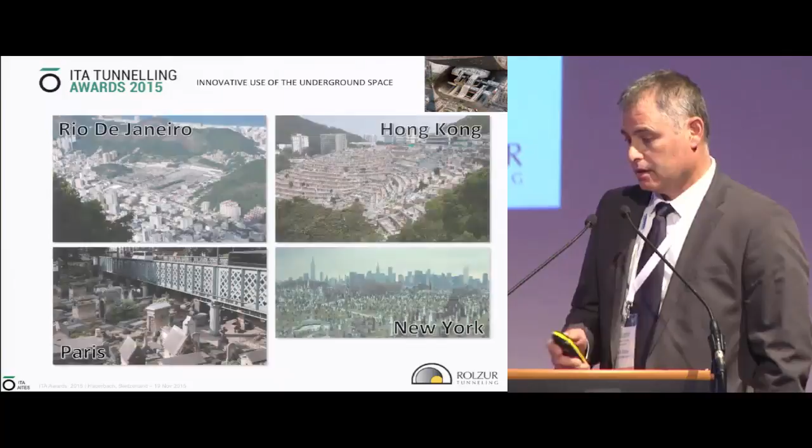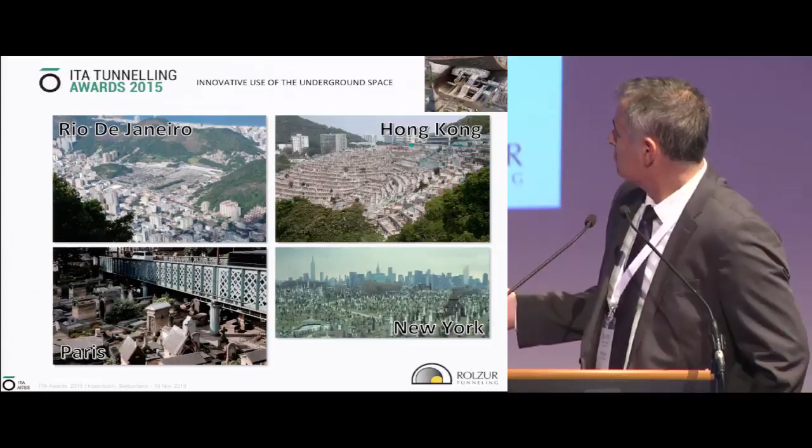Here you can see examples of graveyards from the world: Rio de Janeiro, in Botafogo, and in Paris, New York, Hong Kong. What we see, and I'm sure everyone saw it in his town or crossing through major cities, is crowdedness in cemeteries, narrow lanes, small paths, becoming smaller and smaller through the years. What used to be cemeteries used to be at the city outskirts, but cities grew and are growing all the time. As a result, the community and housing are suddenly going very next to the cemeteries.

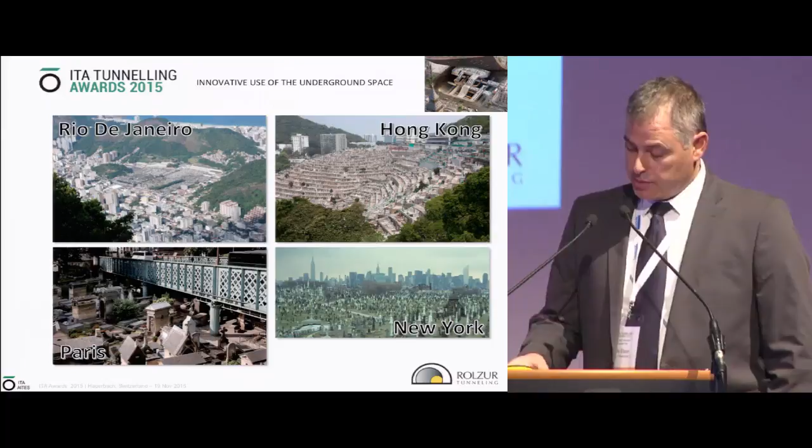Another problem is the decreasing number of visitors. Through the years, people less and less go to cemeteries to visit their deceased family members. And what happens is basically what I call lifeless islands inside cities. I'm sure everyone saw an example of that.

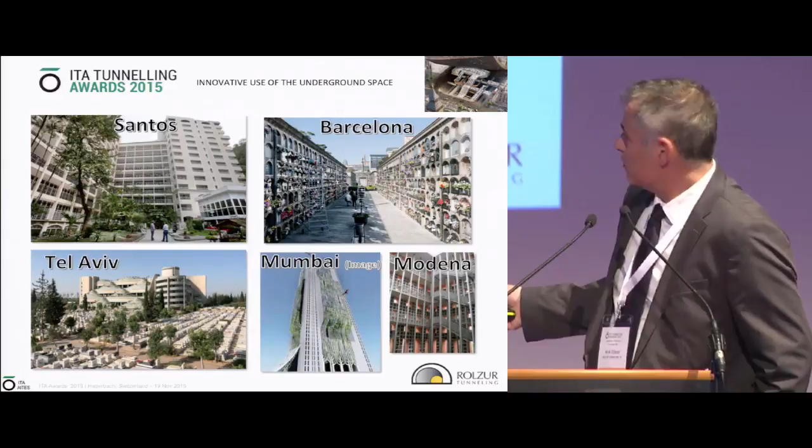Solutions worldwide, because of the cost of land and the will to save the environment and everything related to that, we see examples. For example, in Santos in Brazil, you see a huge building, like a skyscraper. Examples in Barcelona and Tel Aviv - this is recent, and we have similar things in Jerusalem, you'll see shortly. In Modena, Italy, a very nice building, but still a building where we are placing people.

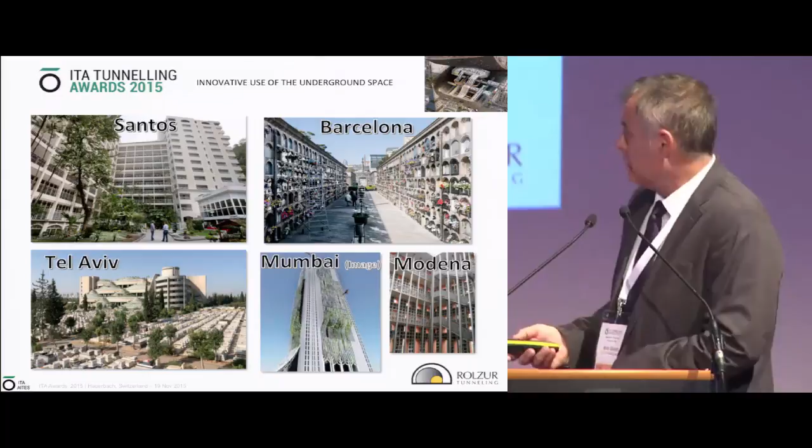And here is an image I saw that's planned to be done in Mumbai. Again, it sounds - you know, using today's world - I just don't like it, and I'm sure most of you don't like it either.

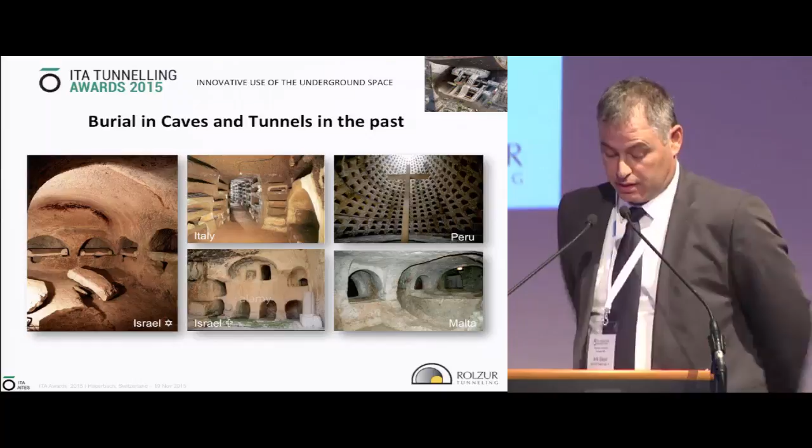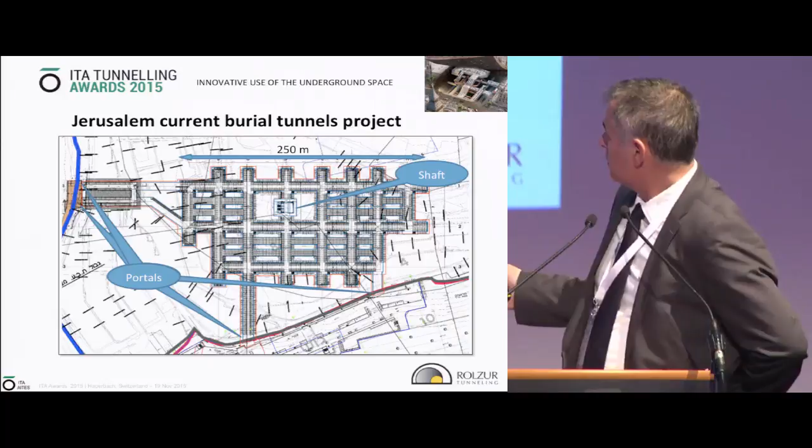This is the project we are doing now in Israel. We started a small pilot project here, a 250-meter tunnel, underneath an existing cemetery, and after we saw it makes sense, we are now building this big project. We have 4 portals, 1 main shaft with elevators, and this project is for 22,000 tombs that will be installed there through the years.

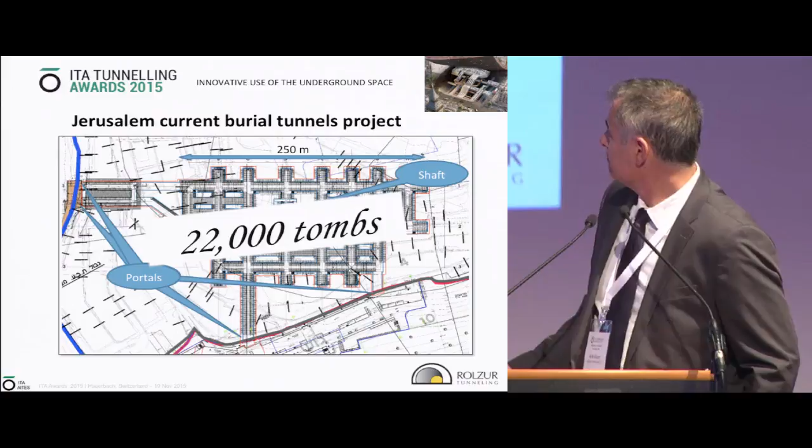Some points about design and construction aspects. Architecturally, it's very important to work with the client, and here again we are working with the client and his needs. We have to take care of lighting, acoustics, and the materials - everything is very important here.

Geology - as always in tunneling, we did some site investigation, and we are doing continuous ongoing monitoring. For tunneling, we are using the NATM system, so we have various methods for how to treat each type of rock, and we're using mainly roadheaders. We have to remember that we are working underneath an existing cemetery, so we don't want to use explosives too much in order to avoid interfering with the living people around. And of course, we have to take care of waterproofing.

Construction is very strange because cemeteries in many religions become sacred places. So actually you cannot come and wreck the building and start again after a few years, even though some countries do that. So we are building the concrete structures inside for an infinite life span. It's a bit different - each concrete element has to be thicker now, and everything is more of an investment.

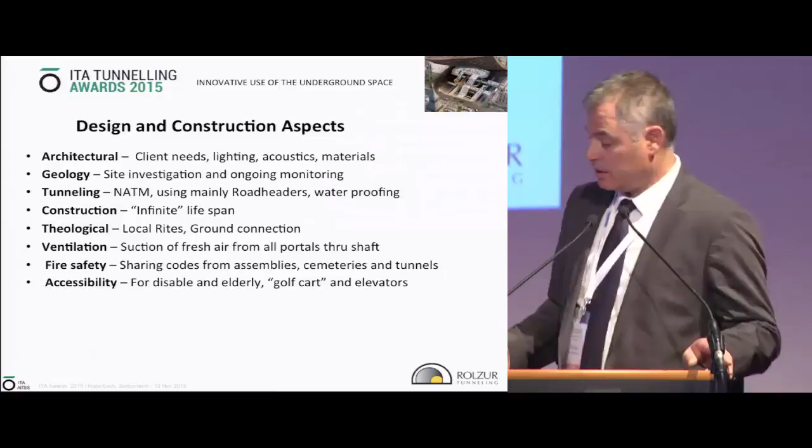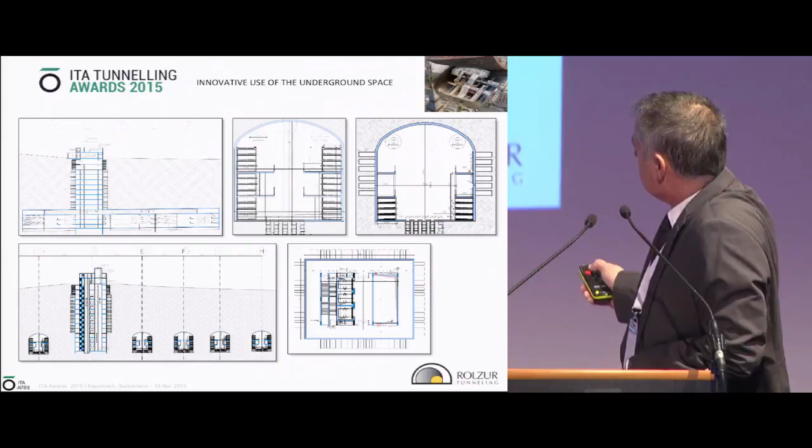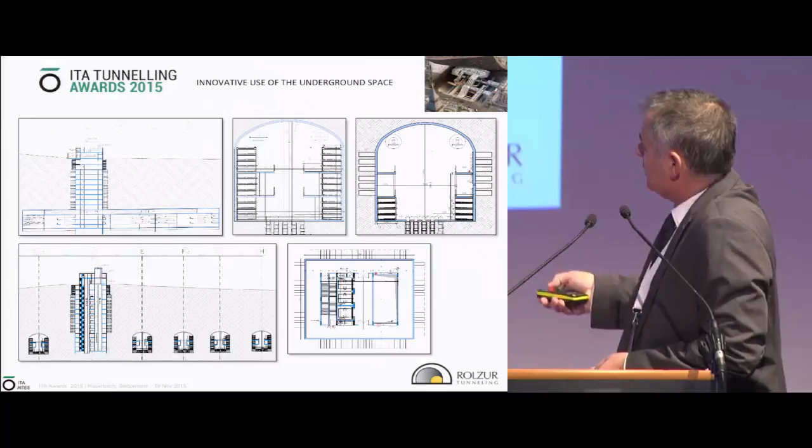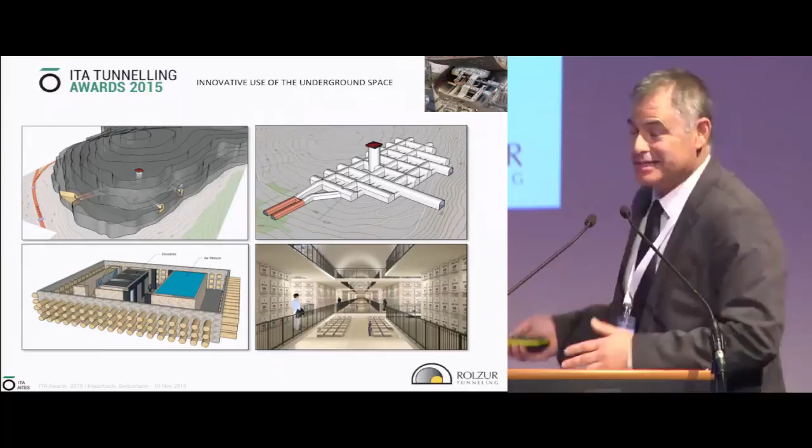This will hopefully show how it's going to look at the end. It's going to be very nice. Okay, I'm trying to speed up.

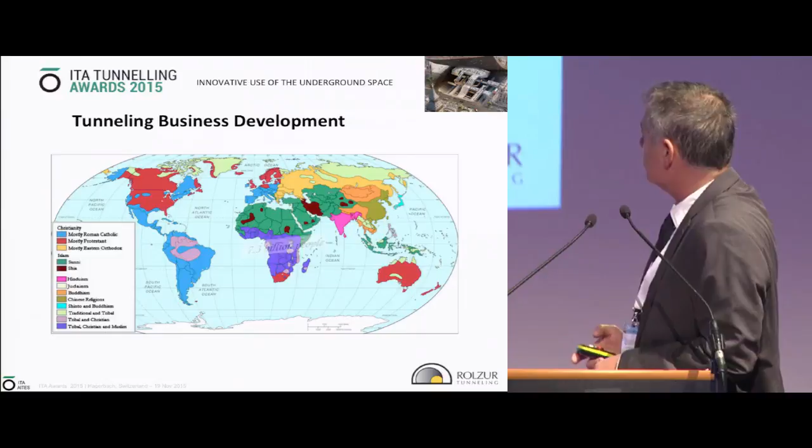Tunneling business development, actually the entire world. There are 7.3 billion people, lucky or not lucky, but whether we want it or not, in the next 80 years everyone has to be replaced.

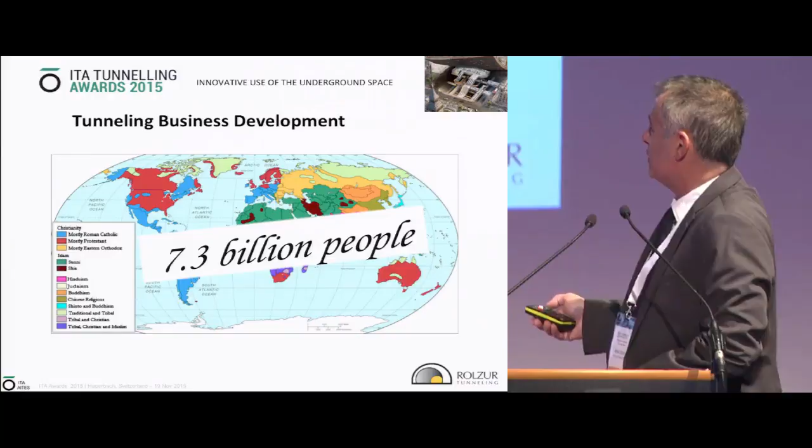It has to be developed in each place according to its rites and religion, and then it can be monitored and directed to the right solution. Some advantages, and I'll go very quickly: reviving ancient tradition is a kind of privilege, especially if you do it nicely and with new ideas.

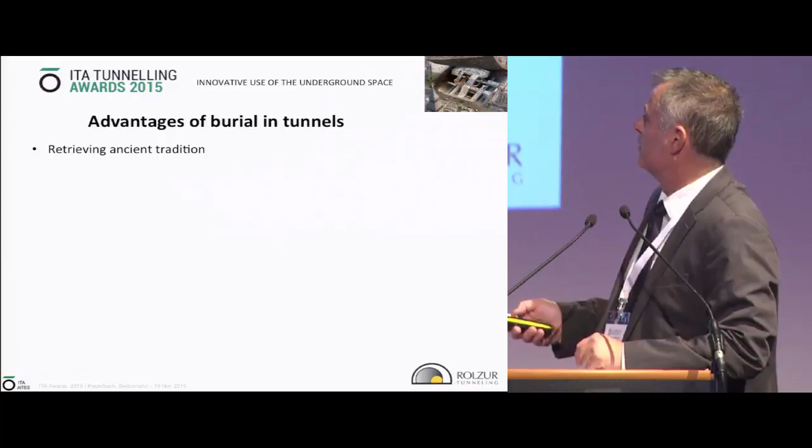Maintaining direct connection to the ground is very important that we keep it. Preserving the landscape, of course. Keeping the cemetery close to the community.

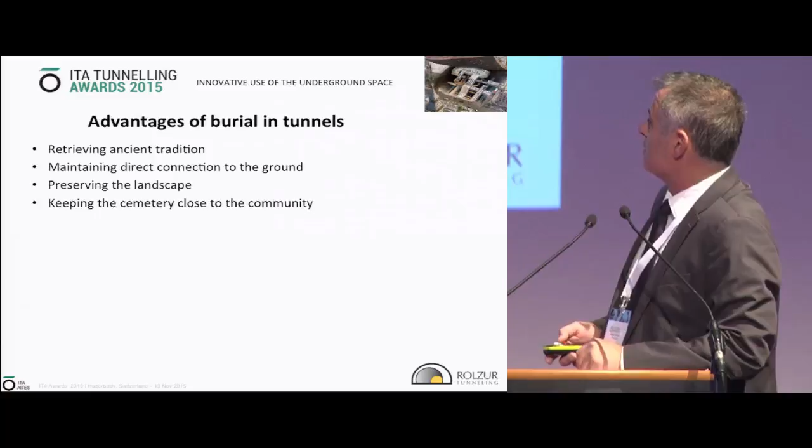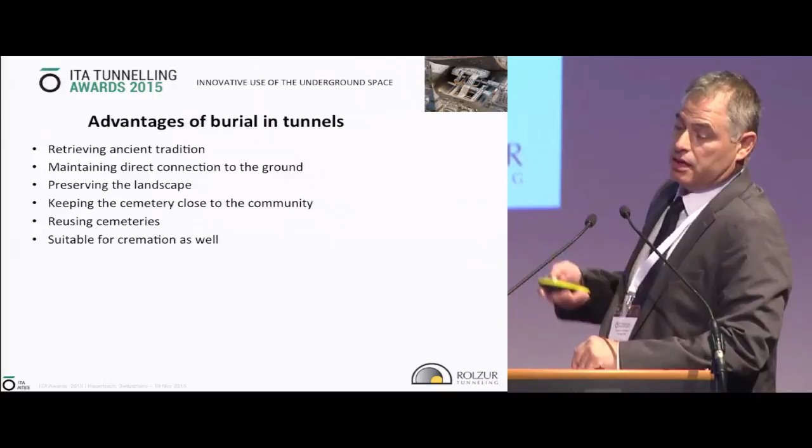Reusing cemeteries, because we recommend building it underneath an existing cemetery. It's also suitable for cremation, and this is a very big issue to talk about, but again, cremated people can also be placed there. It will always be a shelter from wind, sun, rain, and snow, so it will be okay to be there at any time.

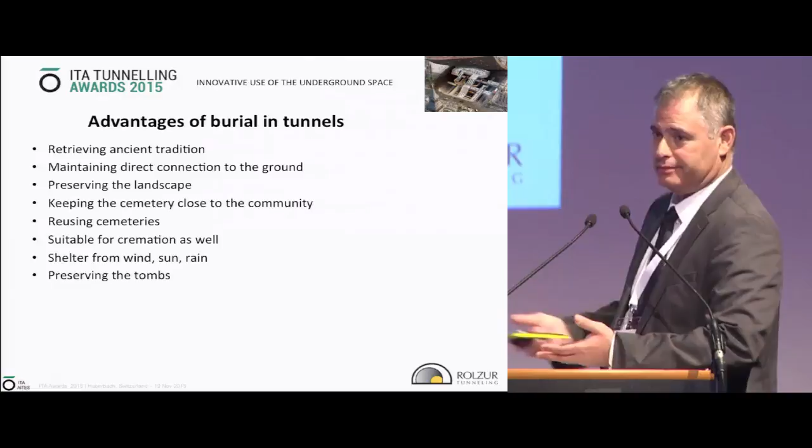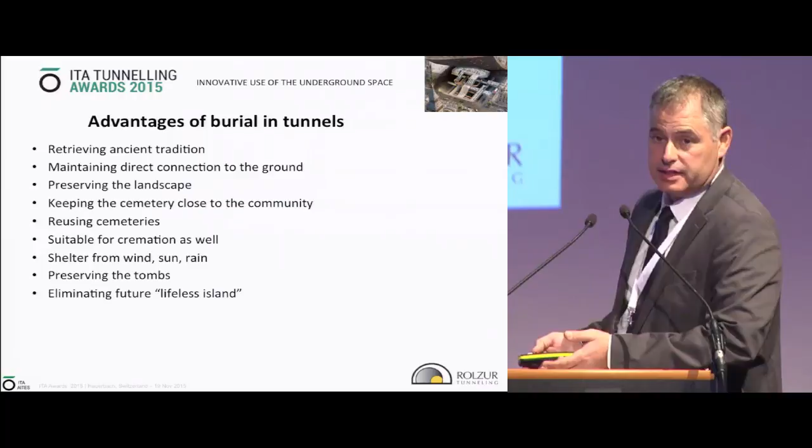Preserving the tombs - everyone has seen cemeteries where there are no more writings because rain and wind erased them. And of course, we are eliminating the future lifeless islands. So basically, reviving burial in tunnels - in the future we think it should be the future of cemeteries in cities around the world. Now I have a very short movie.

I don't know how it works.

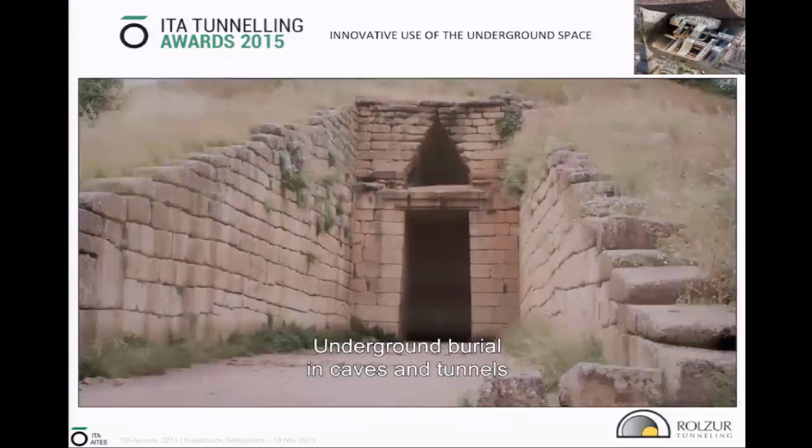Underground burial in caves and tunnels was common in biblical times and for thousands of years in the Holy Land as well as Europe. For dust you are, and to dust you shall return.

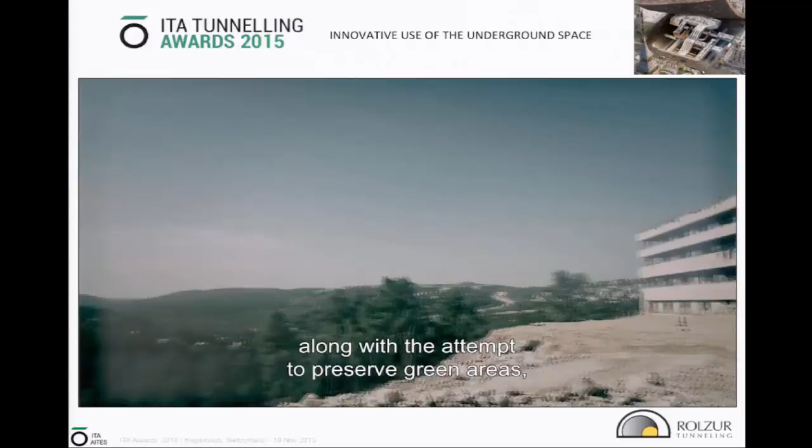In our day, due to population growth and land costs, along with the attempt to preserve green areas, cemeteries have become a nuisance, especially in cities and other large communities. They are lifeless islands in the midst of heavily populated areas. Cities worldwide are seeking to allocate less land to maintain current burial practices.

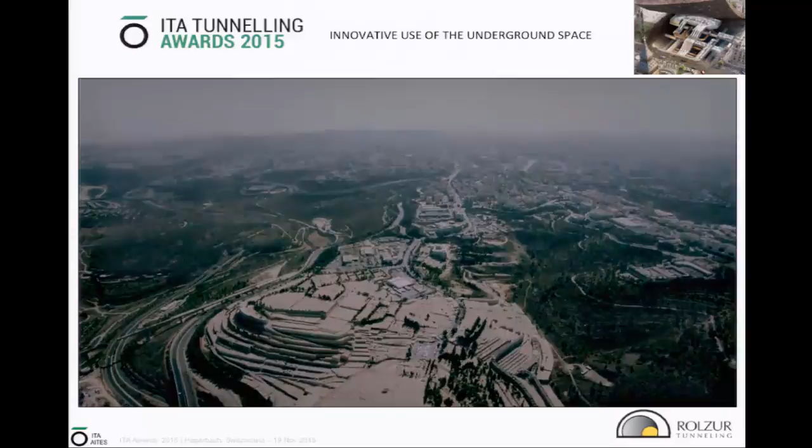Rolzur Tunneling, Israel's leading company in the construction of underground tunnels, caverns, and shafts, has come up with an innovative solution: reviving burial in tunnels.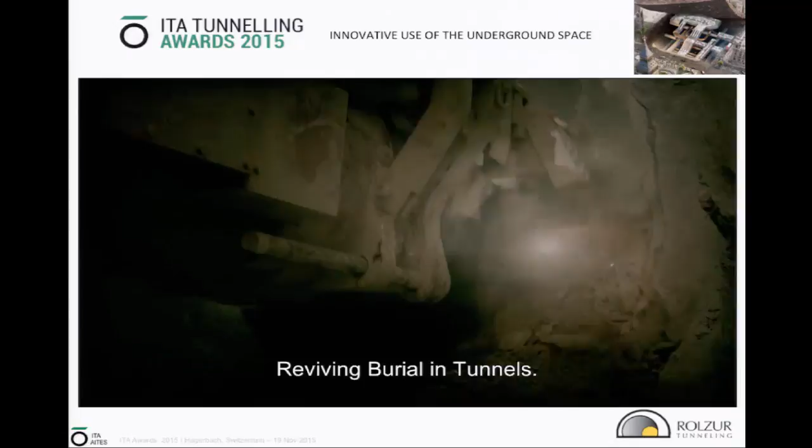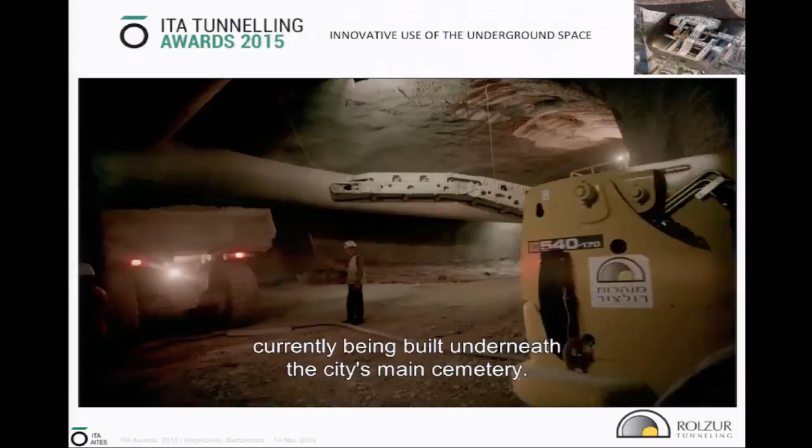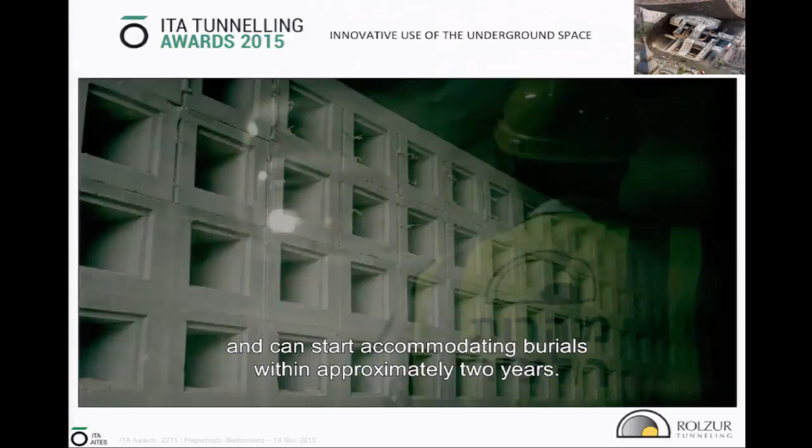A successful pilot experiment in Jerusalem led to a large-scale project currently being built underneath the city's main cemetery. The present project for the construction of 22,000 dignified, respectable plots will be implemented in stages and can start accommodating burials within approximately 2 years.

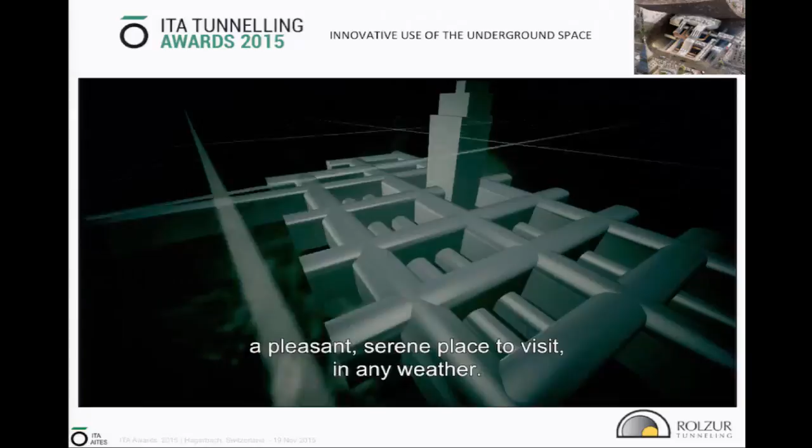One of our major goals is making the new underground cemetery a pleasant, serene place to visit in any weather. All religious guidelines and rites are being taken into consideration, alongside the required engineering aspects.

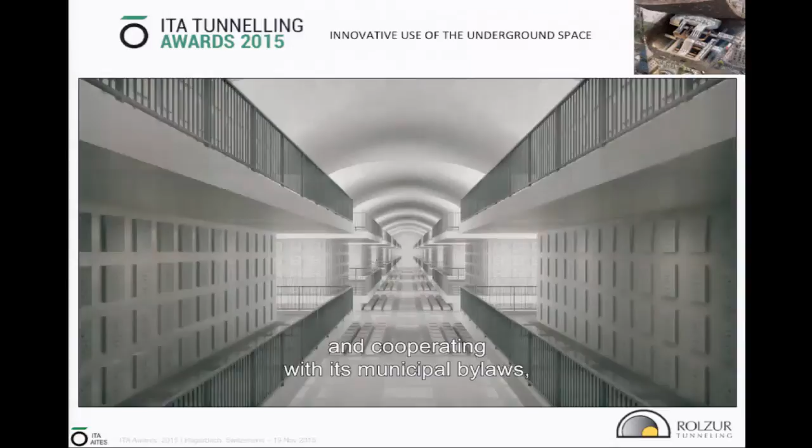We offer tailor-made solutions while working closely with each community, honoring its local customs and cooperating with its municipal bylaws to build the most suitable underground cemetery for that area. Environmental concerns are constantly borne in mind.

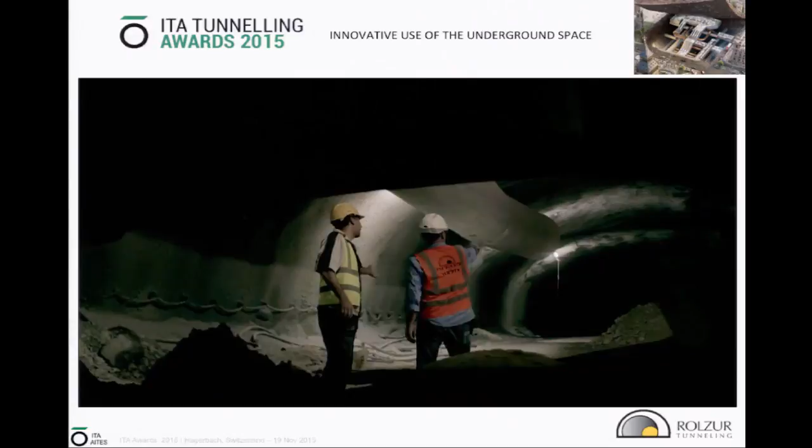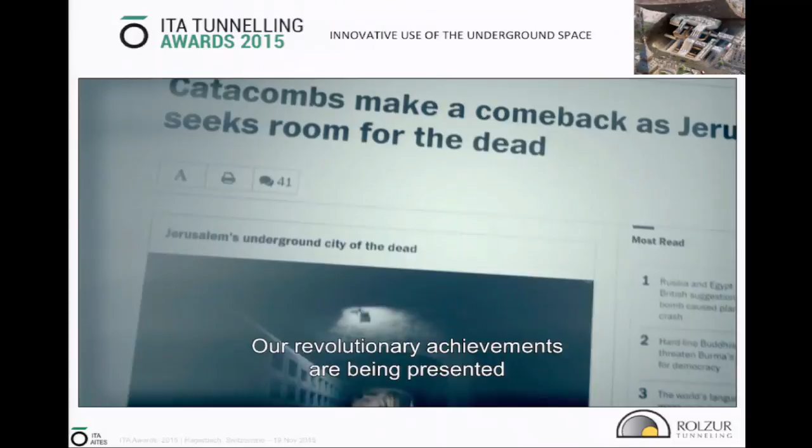Our innovative solutions have already generated worldwide buzz, and articles have been published across the globe, from Russia to the US. Our revolutionary achievements are being presented at distinguished conferences, both engineering and theological, and Rolzur has even been nominated to receive an award for the most innovative tunnel solutions of the year from the International Tunneling and Underground Space Association.

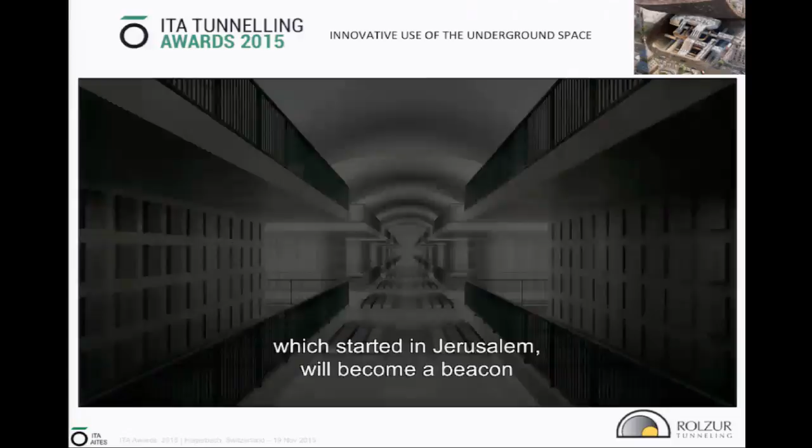We are certain that reviving the practice of subterranean burial, which started in Jerusalem, will become a beacon for the planning of future cemeteries around the world.

Thank you very much, and don't forget, in this world, it's death and taxes, not in the same order.